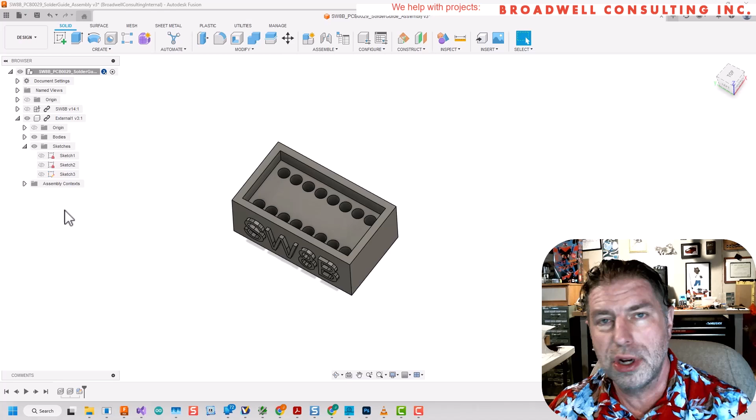So to fix this annoyance, I created this 3D printed design which aligns the pins, lets you set the board on top, and easily solder it in. And it works great — no worries about the PLA melting during the relatively quick soldering process of the pins or anything like that.

I wanted to show you how easy it was to create this because I have access to the CAD files, which you also will have access to because it's an open source design, so you could do something similar if you wanted.

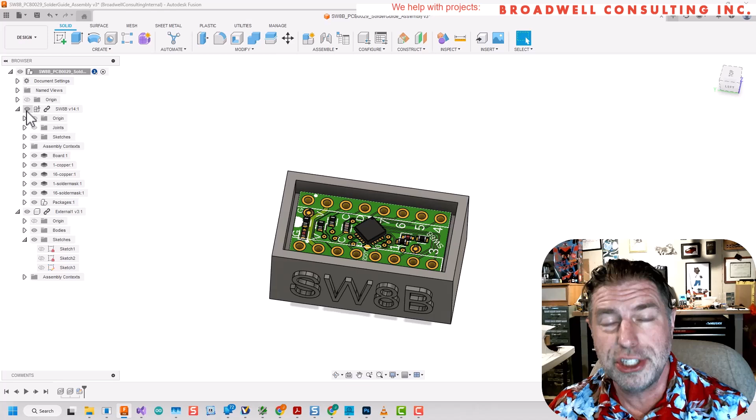Now let's take a look just real quick at the steps I went through in Fusion once I had this 3D board, which you have access to, to create this soldering block.

First, we'll turn off all the layers except for the FR4 so that all we get is the actual board hole outlines when we go to do a projection in a minute.

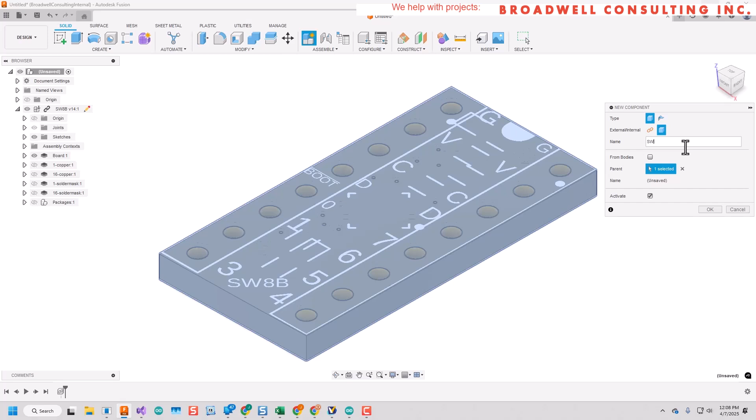Then we'll create a new external component in the assembly. Next, we'll make a sketch on the board plane and then project the pinholes so that we can use them once we extrude out from here.

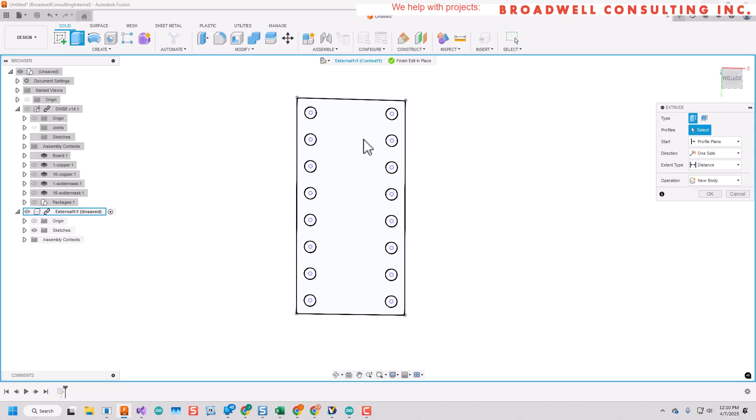Then we'll extrude the block down 7 millimeters because that's how much space we need in order to be able to drop the pins into the holes.

Next, we'll do a couple of millimeter thin extrude around the outside of the block so that we can create the little enclosure that will hold the chip in its proper location.

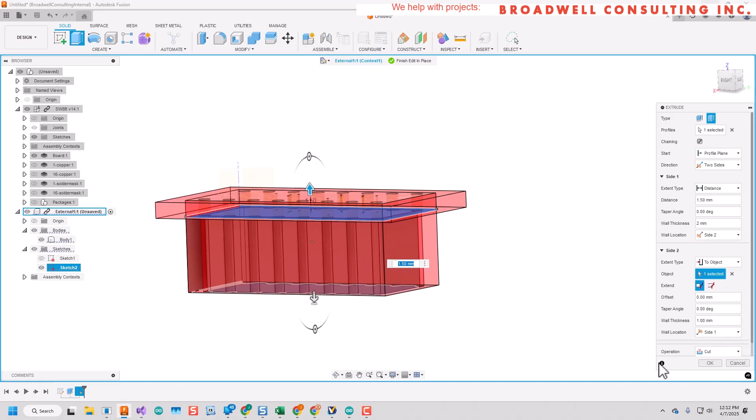We'll set the height of this extrude so that it comes up just barely below where the top of the FR4 would be when we go to solder the pins in, so that we don't interfere with the soldering iron with the plastic.

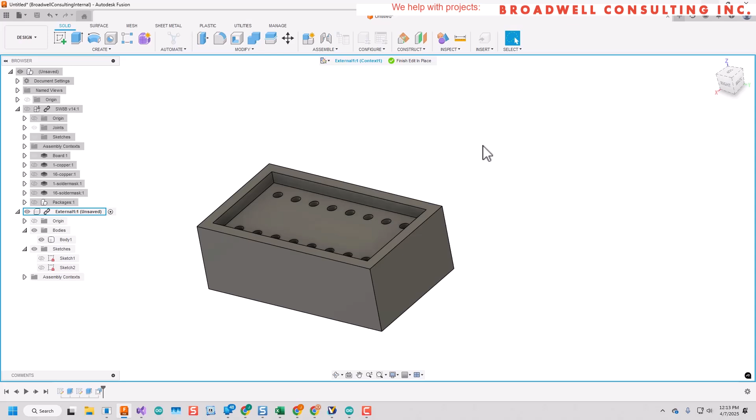And I turned my camera off, so I missed this part. But the other thing we'll do is go on each of the holes that you drop the pins into, and on the inside of that lip, add a 0.7 millimeter offset.

That's what's appropriate for my 3D printer — yours may vary — so that everything is big enough and everything fits. In a case like this, it's better a little too big rather than a little too small. Things may wobble a little bit, but at least they'll fit.

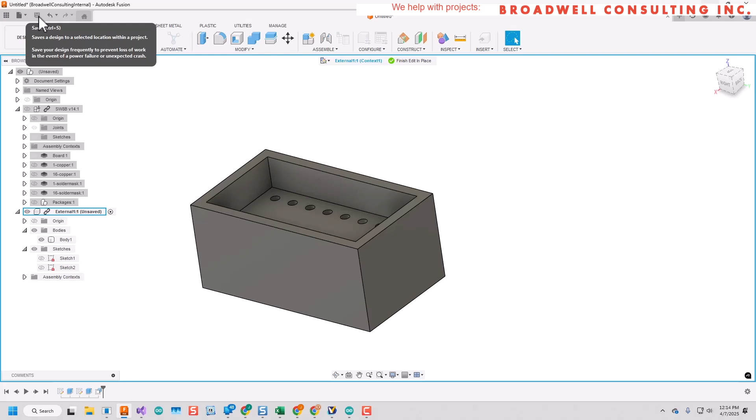So at that point, we're ready to 3D print it. So there you have it. You can see how easy it is to take somebody else's open source hardware and quickly create your own accessories or jigs, tools, whatever. It's really important.

If you have a project of your own, I would highly encourage you to get it certified as open source hardware. Until we talk again, have fun, keep making stuff.